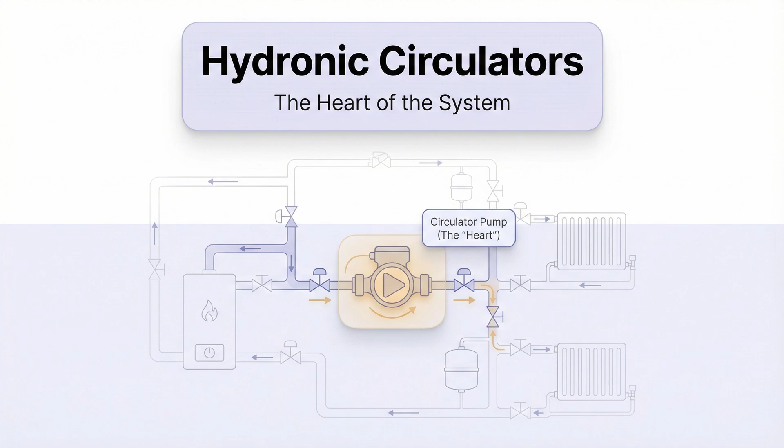Welcome back. Today we're diving into the heart of the hydronic system. Quite literally, we're talking about circulators. Just like your heart pumps blood to keep you alive, the circulator moves fluid to keep the building warm. It's a critical component, and getting it right is the difference between a system that hums and one that causes headaches.

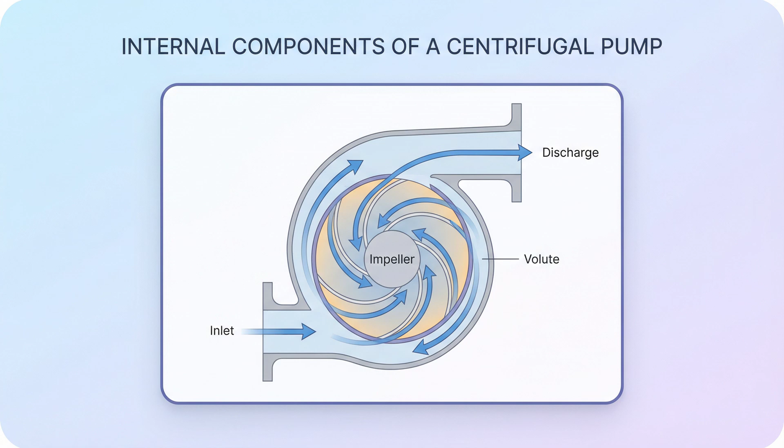Technically, these are classified as centrifugal pumps. Here's how they work. Water enters the eye of this spinning impeller. As it spins, it flings the water outward, adding mechanical energy. That water hits the volute, the chamber surrounding the impeller, and that speed is converted into pressure. It's not sucking water in, it's creating a pressure difference that allows upstream pressure to push water in.

You'll see a few different designs out there. The most common in residential stuff is the wet rotor circulator. It's cool because the moving parts are actually inside the fluid. No oiling required, and they're super quiet. For larger jobs, you might see 3-piece or 2-piece circulators, where the motor is separate. Those are easier to service without opening the plumbing, but they need a bit more maintenance.

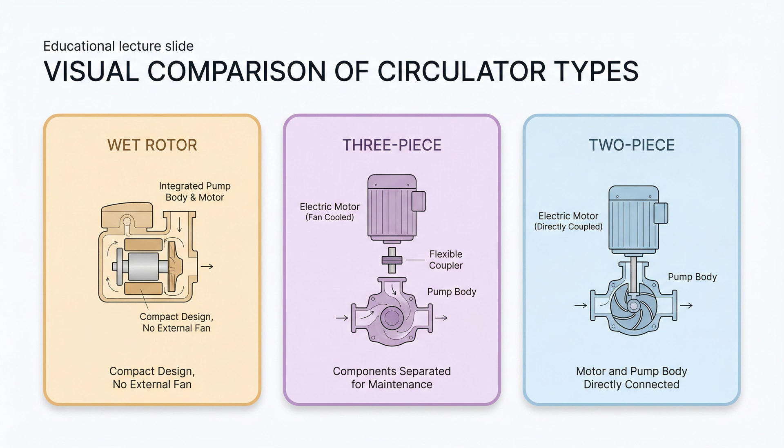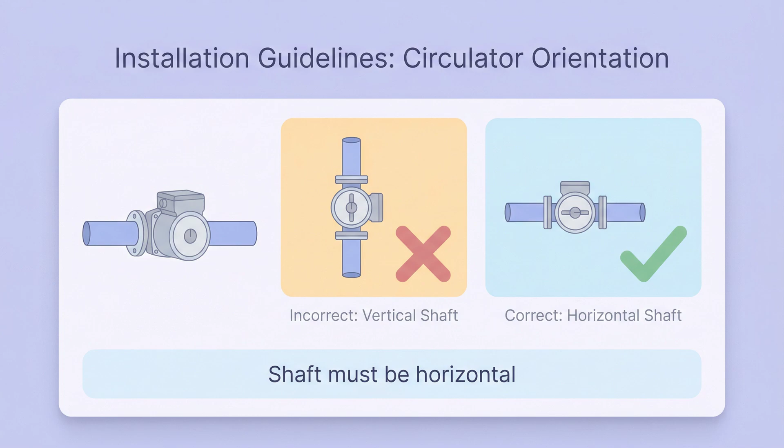Now, here's a rookie mistake you want to avoid. When you mount these things, the shaft usually needs to be horizontal. If you mount it so the motor is hanging down or sticking straight up, you might damage the bearings or trap air. Always check the manufacturer's arrow, but generally, keep that shaft level.

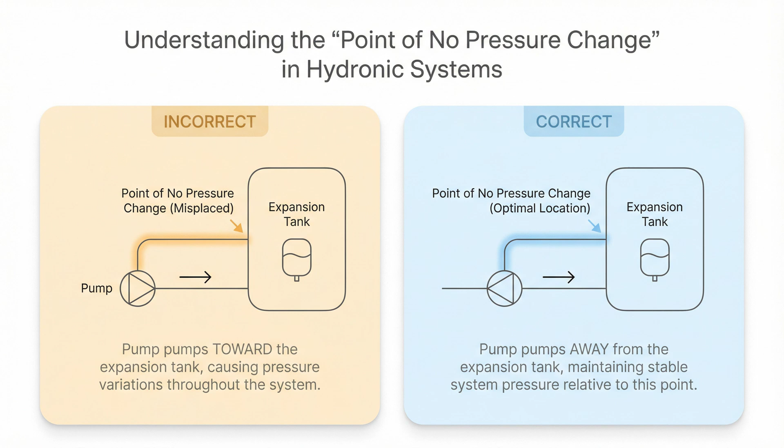If you remember one thing from this lecture, make it this: pump away. You want to place your circulator so it pumps away from the expansion tank. The tank is the point of no pressure change. If you pump away from it, you add pressure to the system. If you pump toward it, you subtract pressure, which can suck air into your vents. Trust me, pump away.

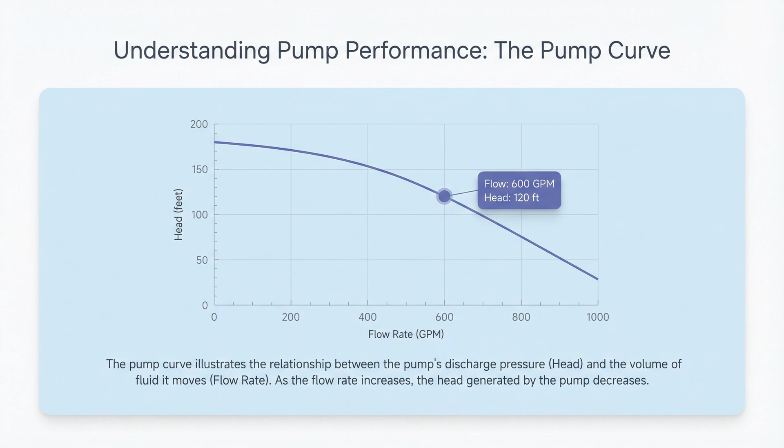Let's talk performance. Every circulator has a pump curve like this. It shows the relationship between how much pressure, or head, it can produce and how much water it can move. Notice the trade-off? High flow means low head, and high head means low flow. You can't have maximums of both at the same time.

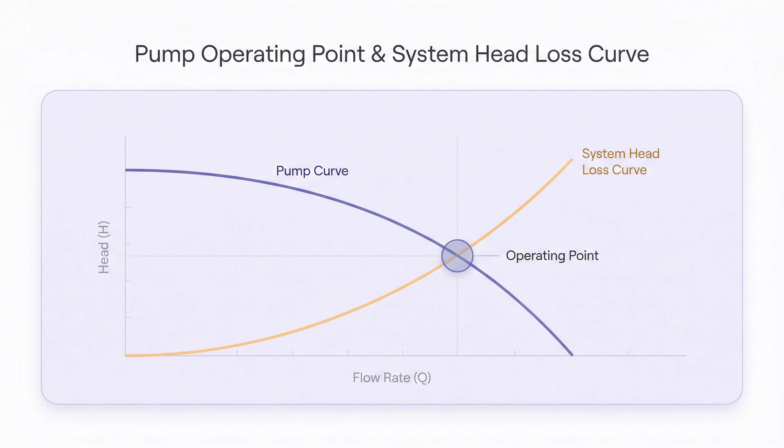Now, the pipe system itself fights back. That's the system head loss curve. Friction resists the water flow. Where your pump curve crosses the system curve, that's the magic spot. That is your operating point. That's the actual flow rate you're going to get in the real world.

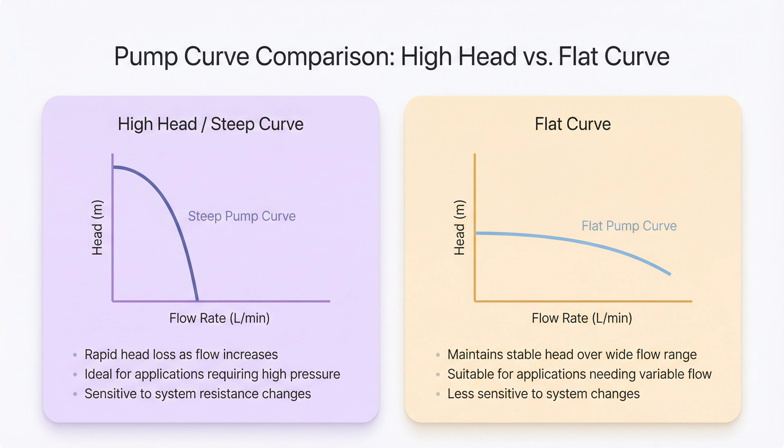Not all curves are the same. Some are steep, great for high-resistance circuits like radiant floor tubing. Others are flat. These are awesome for zone valve systems because the pressure doesn't change much, even if valves open and close. Matching the curve shape to your application is just as important as the horsepower.

What if one pump isn't enough? You can put 2 in series, like a booster. This doubles the head pressure. It's like stacking batteries. But notice, it doesn't double the flow rate. It just gives you more muscle to push through resistance.

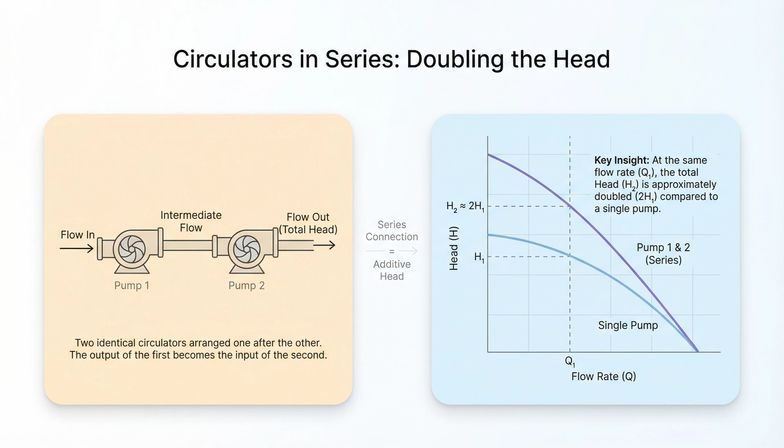Alternatively, you can wire them in parallel. This is for when you need a lot of volume. It increases the flow, but it won't double it unless your piping is massive. Also, huge tip, if you do this, you need check valves on each pump so the water doesn't just spin backwards through the one that's turned off.

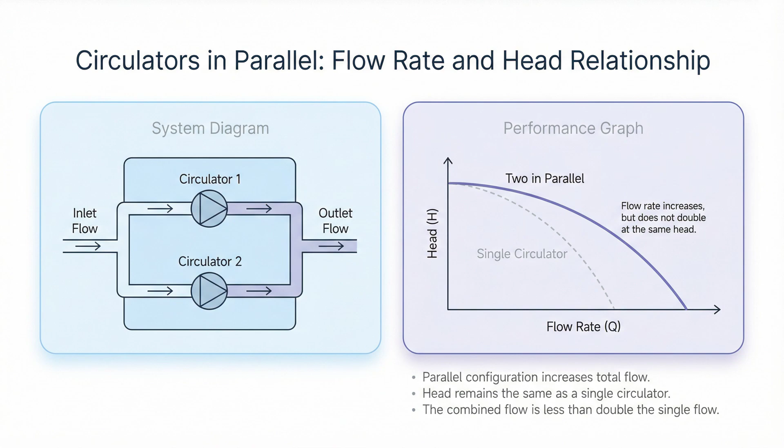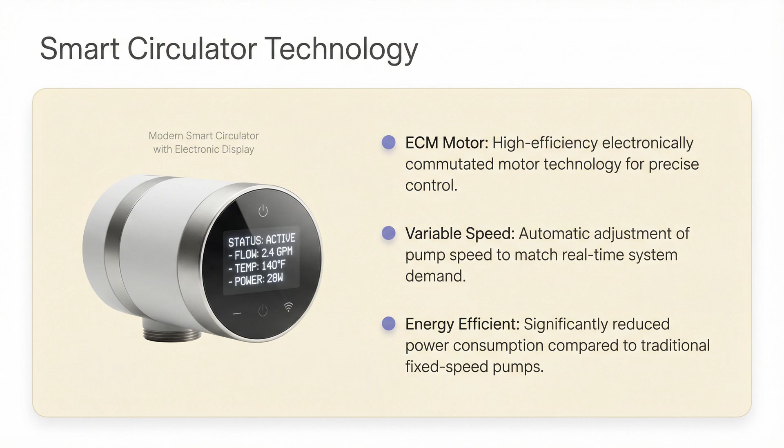This is where the tech gets cool. Smart circulators use ECMs, electronically commutated motors. They use permanent magnets and microprocessors. They can actually sense what the system is doing and change their speed automatically. They use way less electricity, and they can solve a lot of flow problems on the fly.

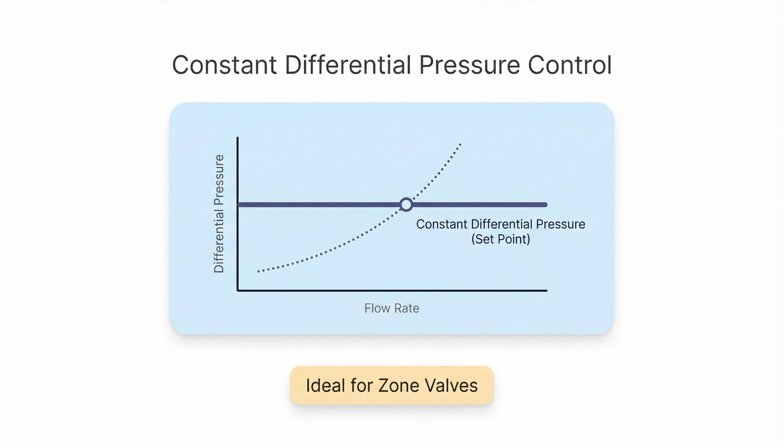For example, smart pumps can offer constant differential pressure. Imagine a system with 10 zone valves. As valves close, a normal pump would fight harder and build up pressure. A smart pump just slows down, keeping the pressure steady. It saves energy and stops your pipes from whistling.

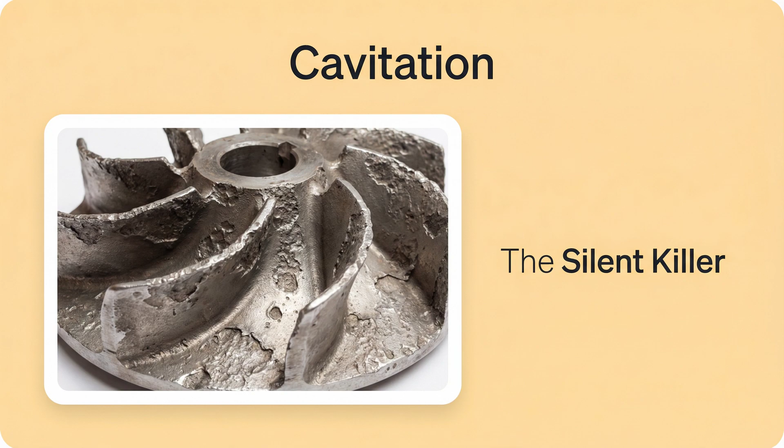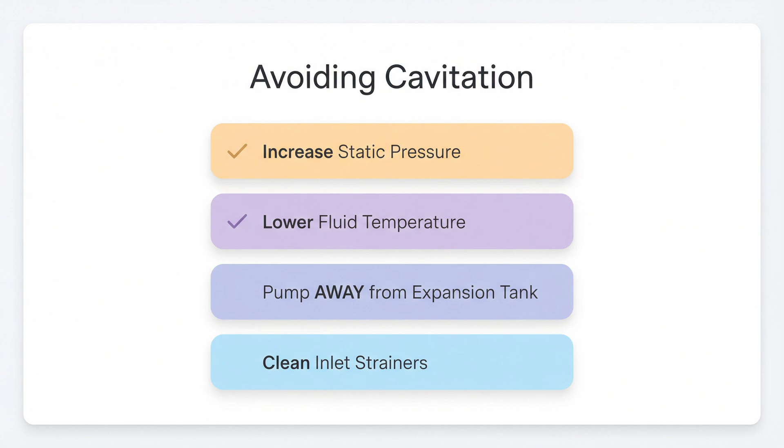And then there's the enemy, cavitation. If the pressure at the pump inlet drops too low, the water literally boils at room temperature. It forms vapor bubbles that implode violently. It sounds like gravel rattling in the pipe, and it will chew up a metal impeller in no time. So how do we stop cavitation? Keep the system pressure high enough, keep the temperature reasonable, and like I said before, pump away from the expansion tank. If you starve the pump inlet, you're asking for trouble.

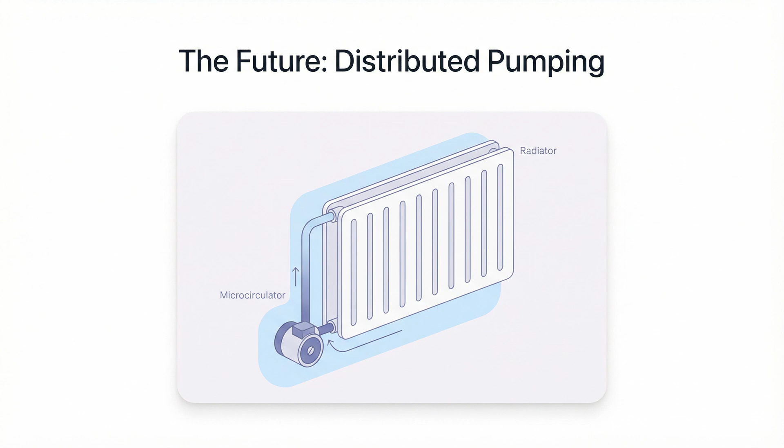Looking ahead, we're seeing microcirculators. These are tiny pumps using as little as 3 watts, like a nightlight. You might see one on every single radiator in the future, replacing big central pumps entirely. It's a completely different way of thinking about moving heat.

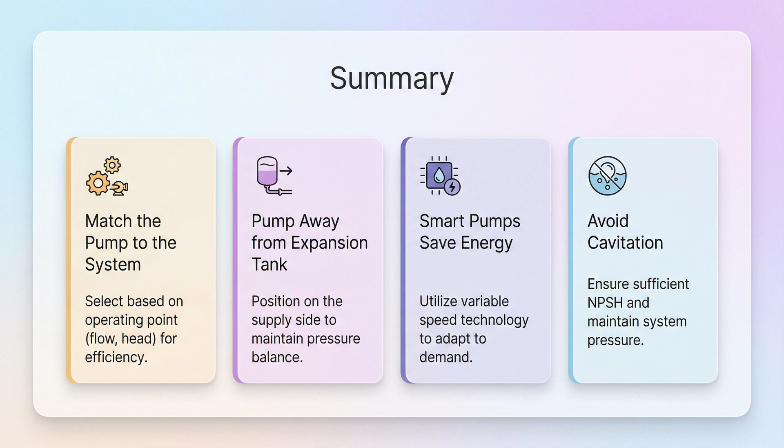To wrap up, circulators are the heart of the system. Remember to match the pump curve to your system needs. Always pump away from the expansion tank to maintain pressure. And seriously consider smart pumps. They pay for themselves in energy savings. Thanks for listening.